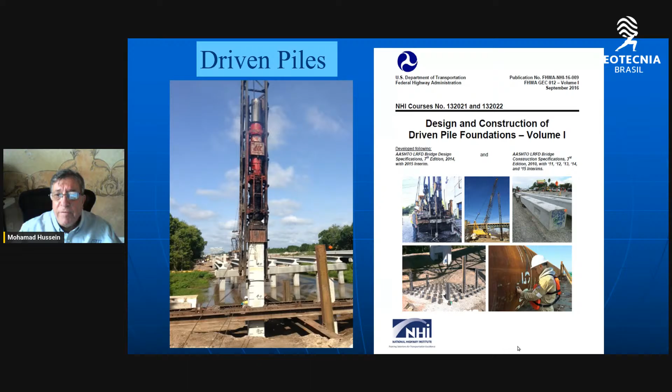They consist of driven piles, and there is a very important manual on the design and construction of driven pile foundations, in 3 volumes, written by engineers from our company, GRL Engineers, which can be downloaded from the FHWA government website for free in PDF format. I will leave my email address at the end of the presentation, so please send me an email and I can send you a link to download this 3-volume design manual.

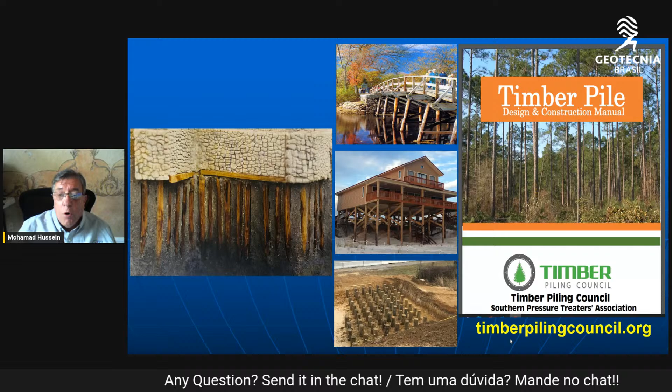Driven piles can be made of wood, concrete, or steel. Wooden piles, timber piles, have been used for thousands of years. In today's practice, they're typically used to support lightly loaded structures or temporary construction, or used as ground improvement supports. This is a manual that can also be downloaded from the Timber Piling Council for free, for the design and construction of timber piles, wood piles.

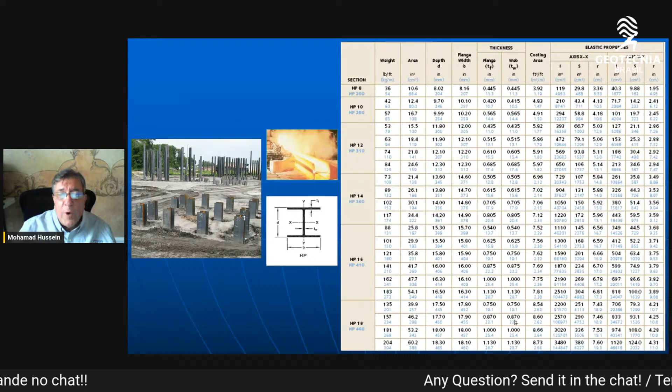Steel piles come in 2 major varieties: H piles and pipe piles. H piles come in about 20 different standard sections specifically manufactured for use as deep foundation H piles. Pipe piles come in a variety of sizes in diameter and length. They range in diameter from just a few inches to maybe a few feet, to more than a few feet, maybe 3 or 5 meters in diameter - very large. They can also be very long when used for offshore applications, for oil and gas exploration, and also for offshore wind farms.

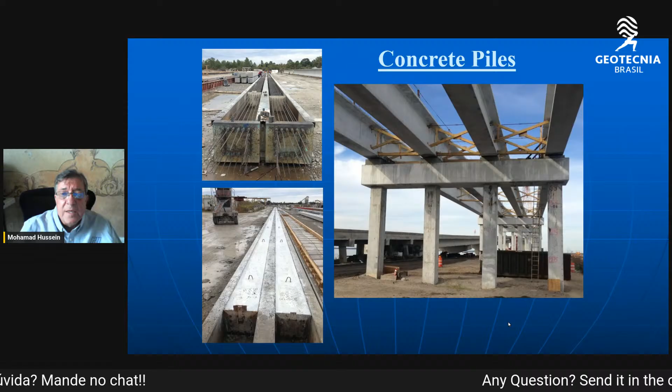Concrete piles are typically pre-stressed. They can be regularly reinforced at times, but they can also be pre-stressed or post-tensioned type concrete piles. The most recent development in concrete piles is the use of ultra high performance concrete, very, very high strength.

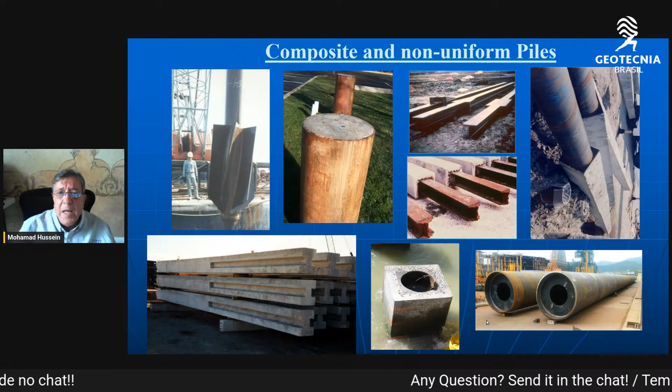While piles are typically uniform and made out of one material, they can also be made of multiple materials in composite, and can be highly non-uniform in profile depending on the design requirements.

There are hundreds of different hammer models ranging from the very simple to the extremely complex, from small to large: air, steam, hydraulic, diesel, single acting, double acting. There are literally hundreds of different hammer models available to drive the various pile types and sizes.

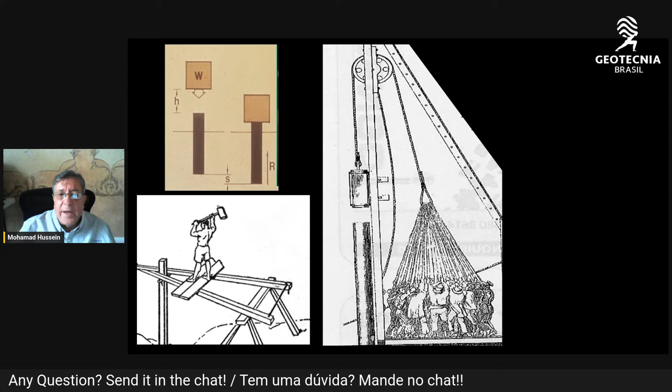For a long time, intuitively, people involved in pile driving had realized that there must be a relationship between the energy to drive a pile and how much load the pile can carry, its load-bearing capacity, relative to the energy it took to drive the pile. Mr. Wellington, in 1888, in the Engineering News magazine, wrote an article that relates the load-bearing capacity of the pile to the weight and drop height of the hammer.

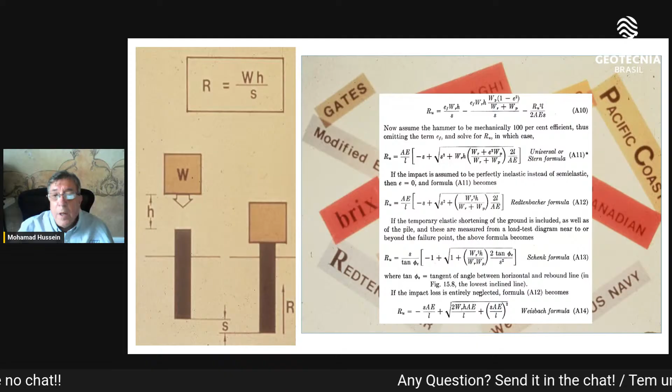This is known as the energy approach, or the ENR formula. Many famous people tried to improve on that formula, and we now have many hundreds of formulas based on that same principle. Some of these formulas look complicated, but they are not really any more accurate. So it would not be prudent to utilize 19th century approach formulas in today's practice. Not very effective, and not recommended for use.

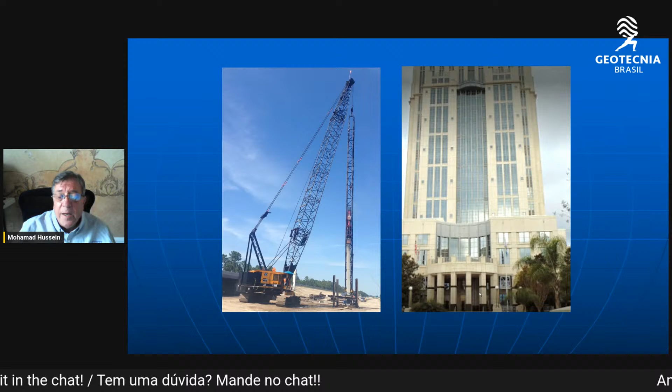So when we drive piles individually, we make a pile group to support maybe a bridge pier or a building. During pile driving, the pile resistance is dynamic pile driving resistance to penetration. But when we use the pile as a foundation, we need its static load-bearing capacity.

In order to evaluate the static load-bearing capacity of a pile, one performs a static load test, where we put load on top of the pile in compression, and then we plot the applied load versus the corresponding pile top movement.

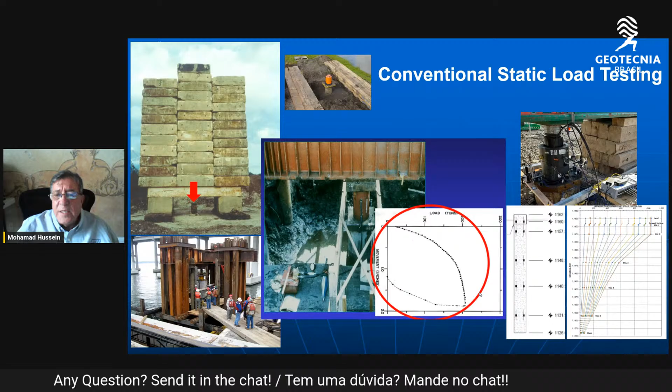We may also put strain gauges along the length of the pile so we can have the strain measurement, the force measurement inside the pile, which allows us to get the load transfer between the pile and the soil, showing how much skin friction and its distribution, and how much end bearing we have. So this is a static load test, and it is the best way we can evaluate the static load bearing capacity of the pile.

However, it has many limitations. It costs a lot of money and takes a lot of time to perform the static load test. In some cases, it could be impossible to do in certain situations. Also, there is an aspect of safety when we perform these static load tests. So although it's a good thing to perform a load test, it has many limitations in real practice.

So the challenge that we have is how do we get from the pile driving resistance during installation to the actual static load bearing capacity in service.

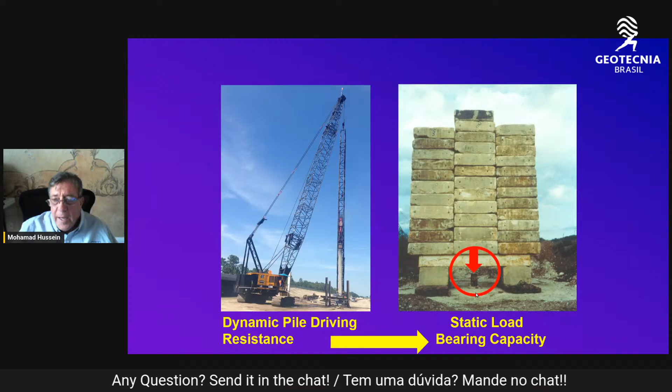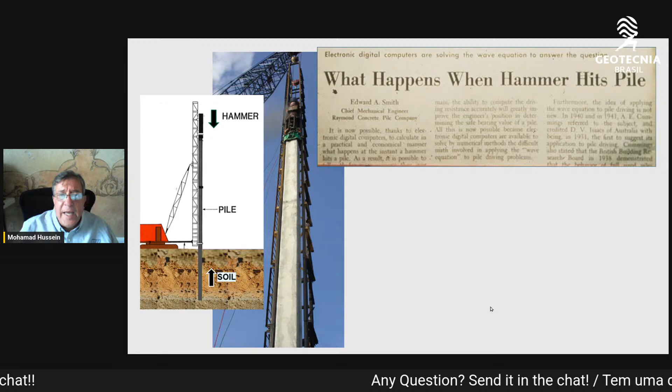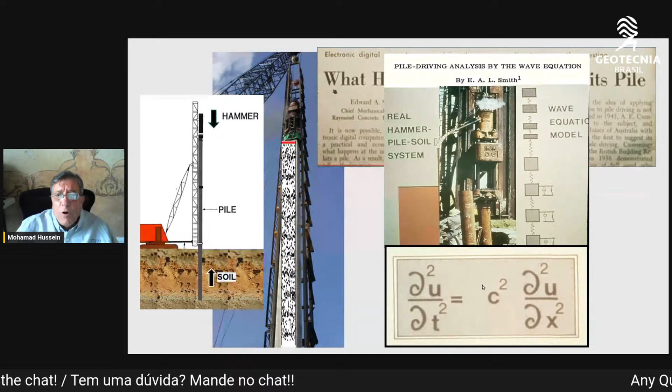Many very smart people for 500 years have thought about the dynamics of bodies in motion. They came up with a wave equation, stress wave propagation, and elastic theories that apply to pile driving. A very smart engineer called Mr. Edward Smith, in the 1940s in Texas in the United States, realized that the dynamics of pile driving are best represented by theories of stress wave propagation, elastic one-dimensional stress wave propagation in the pile, and he wrote a computer program that utilizes the wave equation, stress waves in the pile, to solve the dynamics of pile driving.

He wrote a computer program called the Wave Equation Analysis of Pile Driving. This program, which Mr. Smith wrote in 1948, is often cited as the first program in civil engineering, the first computer program written in civil engineering, to follow the stress wave in the pile, the dynamics of pile driving.

In today's practice, the most widely used program, maybe worldwide, for the dynamic analysis of pile driving is called GRL-WEAP, as commercialized by Pile Dynamics, available from Pile Dynamics.

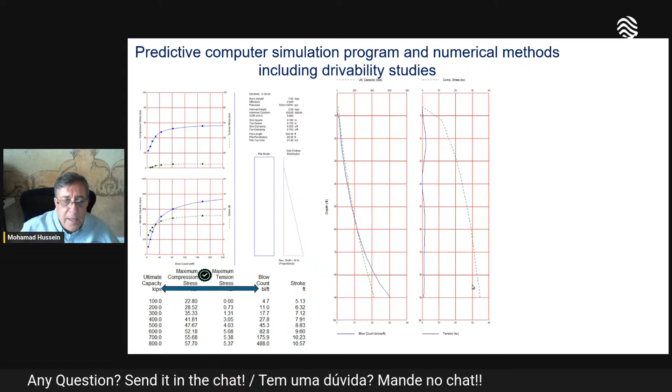It's a predictive computer simulation program that uses numerical methods to include pile drivability. We can assess the driving of the pile by simulation beforehand that provides information relating the pile driving resistance and blow count, blows per meter, to ultimate static load bearing capacity.

This can be used by the pile driving inspector by utilizing a unit called the saximeter on site to follow and automatically calculate the stroke of the diesel hammer, for example, and also to count the blow count every quarter meter of penetration, generating a completely automated pile driving installation log that can be used as quality control and assurance to drive every pile to the required resistance.

However, being a simulation program, it depends on a variety of assumptions to generate the model that is needed to perform the numerical analysis using wave propagation theories in the computer by simulation.

But some of these assumptions are very difficult to assume and to obtain accurately, such as the hammer performance, efficiency, the cushions of the material inside the hammer, and the pile-soil interaction, how much skin friction resistance, how much end-bearing resistance, and the elasticity of the soil to pile driving. So all of these assumptions are sources of error in the simulation type analysis of pile driving.

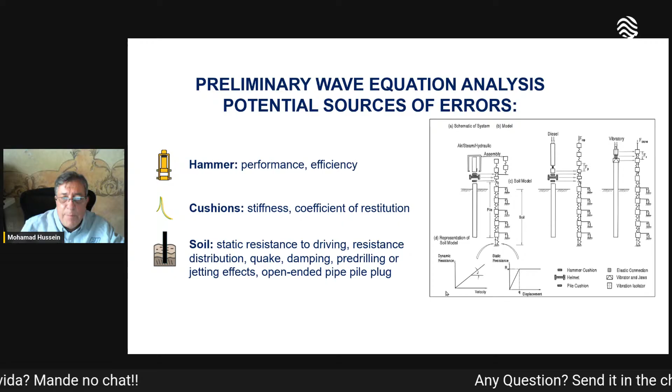So instead of assumptions, what if we think about measurements? If we go out on the job site and measure what we need to know, and analyze these measurements using stress wave propagation methods, that will allow us to obtain information regarding the performance of the hammer, the pile driving stresses, pile integrity assessment, and pile static load bearing capacity.

Between the period of 1964 and 1976 at Case Western Reserve University in Cleveland, Ohio, USA, a research program was undertaken, the goal of which was to come up with an accurate, reliable, cost-effective means to determine static load-bearing capacity from dynamic measurements during pile driving.

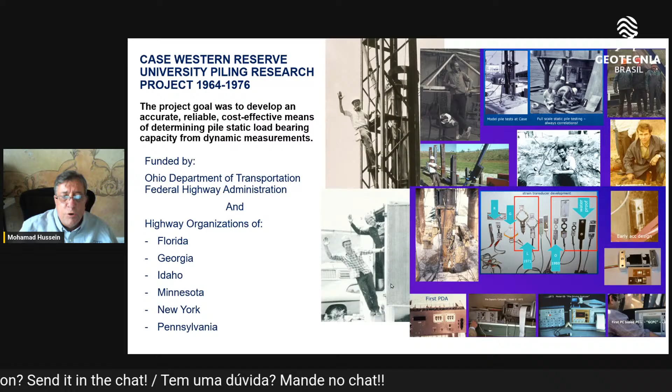That research was sponsored by the United States Federal Highway Administration, the Ohio Department of Transportation, as well as many states such as Florida, Georgia, Minnesota, New York, and others.

That research was headed by Professor George Goble and Dr. Frank Rausche and Gordon Likins. They invented, during that research, the equipment, the sensors, and the computer that were needed to take these dynamic measurements during pile driving.

They issued their final report in 1975 that included the outline of the schematic of the equipment needed for instrumentation, and also for the processing of the data, as well as the science, the formulas needed to calculate the static pile load bearing capacity from the dynamic measurements during pile driving, as well as correlations.

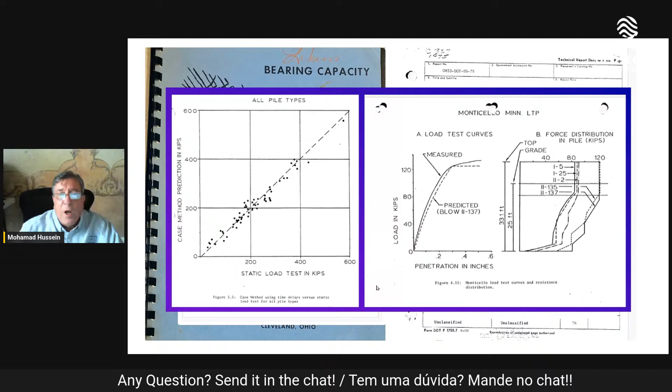They have about 60 or 70 different correlations comparing the prediction of static load bearing capacity from dynamic measurements to the actual full-scale static load test, and the correlation showed excellent comparison. So the researchers felt very confident that we can perform dynamic measurements during pile driving.

We can calculate static load bearing capacity values from these measurements that compare excellently with the actual full-scale static load test. These are the measurements that were taken during the research, and this is a big computer that was used to analyze these measurements.

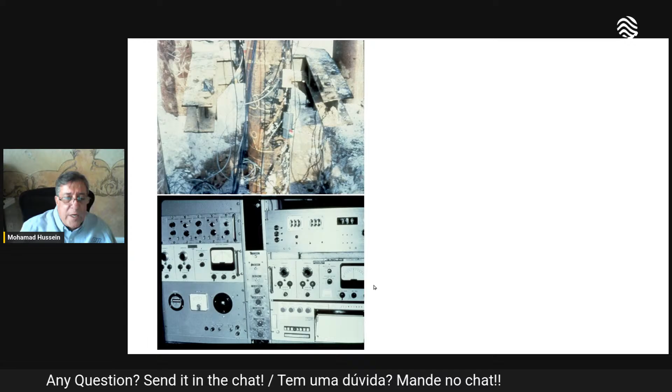So one can call this equipment the first pile driving analyzer. It is the first computer used to analyze pile driving data.

Nowadays, the instrumentation is very, very simple. It consists of two instruments, like 10 centimeters long each, only 3 inches long, very small, that are attached to the pile. They consist of a strain gauge and an accelerometer.

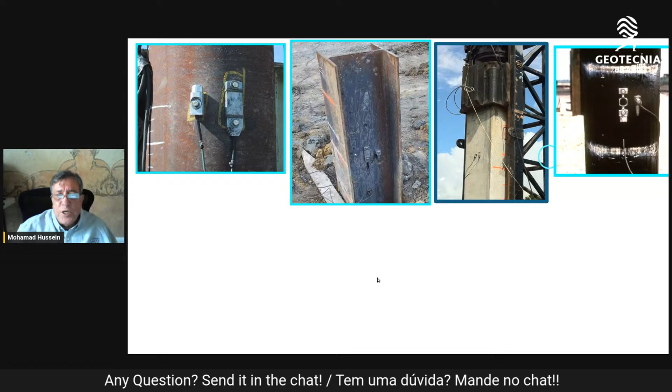The gauges, the sensors used to perform dynamic pile testing, can easily be attached. They are reusable, can easily be attached and taken off all types of pile types, as well as in-situ foundations such as bored piles and drilled shafts, and cast-in-place piles.

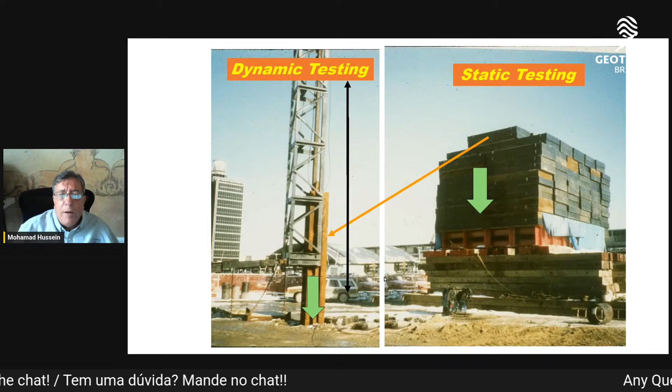I don't have to do any of this. This is being done on the job site with the pile driving hammer. So during the pounding of the pile, during the installation of the pile with the hammer blows, the pile is being dynamically loaded. So all we have to do now is put instruments on the pile and perform dynamic load testing during the pile driving process. The impacts of the hammer are the loading process needed to perform dynamic load testing during initial driving.

This has been standardized by ASTM standard D4945. Testing can be done with the testing engineer on the job site in real time, or it can also be performed remotely using site link technology. So the equipment can be on the job site, sending the data in real time to the engineer in the office, following the project, following the driving of the pile, and performing the testing remotely in real time.

So dynamic pile testing is a measurement of pile strain, therefore force, and acceleration, therefore movement. It is a measurement of pile force and movement under the impact of the hammer, and the analysis of these measurements using elastic stress wave propagation theories.

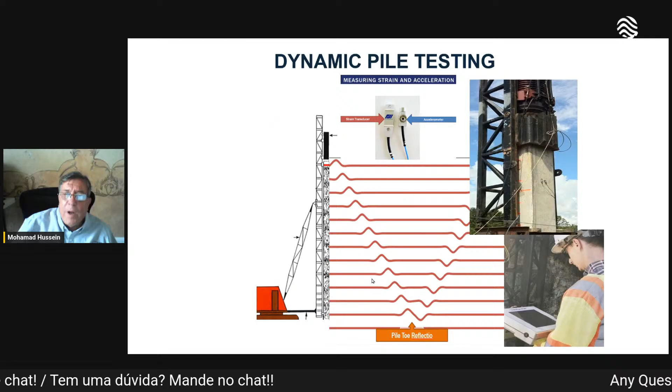The measurements are done with a pile driving analyzer, and the analysis is done by a program called CAPWAP, Case Pile Wave Analysis Program. When the hammer hits the top of the pile, it generates a stress wave.

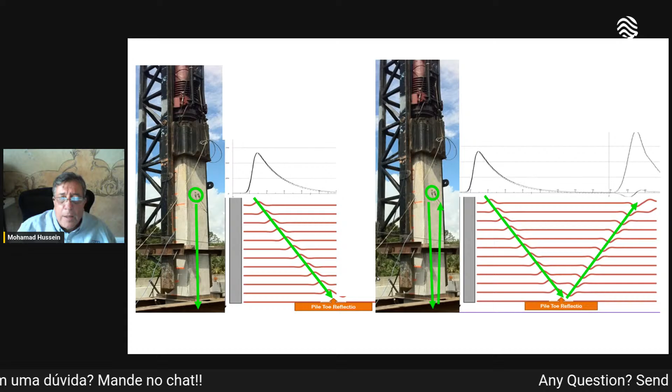When the stress wave reaches a gauge location, one meter below the pile top, the strain and the movement of the pile see a very sudden jump in value. Then the stress wave leaves the gauge location, travels down the pile length, reflects from the pile bottom, and then the gauges sense it again.

So this is one data set from one hammer blow indicating impact at the pile top and reflection from the pile bottom. Of course, the wave goes up and down many, many times during the one hammer blow. It takes about 50 or 100 milliseconds for the whole cycle to go back and forth. One travel cycle, one round trip down and up, is about 5 to 10, maybe 15 milliseconds — a very short time.

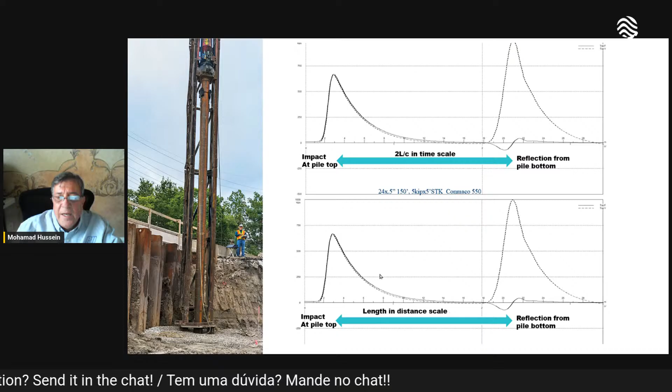So for the measurements of one cycle — impact and reflection, one reflection from the pile toe — we measure it in the time domain. Then we can change it to the length domain by knowing the constant stress wave speed of the pile material. So although we take measurements in the time domain, we do the analysis and evaluation in the distance, or length, domain of the pile.

There are two fundamental principles to keep in mind when we do dynamic pile testing: 2L over C, where L is the pile length and C is celerity, or stress wave speed value. The other value is called Z, which is the pile impedance, giving us a relationship between the two independent measurements of force and velocity.

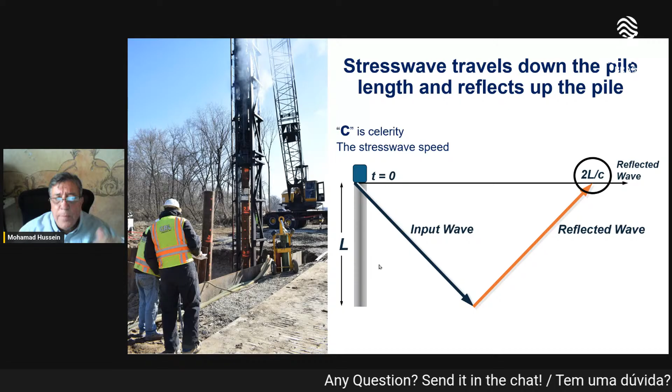We need the value 2L over C because that is how we track the movement of the stress wave down the pile and back up; it gives us the timing of the wave reflections. The impedance value Z gives us a relationship between the independently measured force and velocity in the pile, because force and velocity are directly related to the impedance of the pile.

The impedance of the pile, Z, is a quantity EA over C — elastic modulus times area divided by the stress wave speed — so it is a constant for a specific pile type and size. If we know the impedance of the pile from its elastic modulus, area, and wave speed, all constants, we multiply that by the measured velocity to relate it to the measured force. From these measurements of force and velocity at the pile top, we can calculate the wave going down the pile and the wave going up the pile.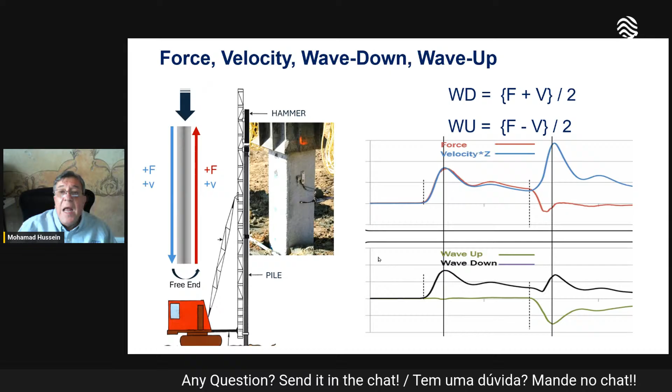So now we have the waves in the pile going down from impact of the hammer and waves reflected under each and every hammer blow. Since we're taking measurements during pile driving under each and every hammer blow, we now have a complete full record of the installation, and therefore the testing of this pile in its entirety. Every blow has a value.

Now we can group all of these different blows. We can average them per 25 centimeters of pile installation, or per meter, or per foot, or per inch. We can group them as such and plot them as a function of pile penetration depth. So the y-axis is pile penetration depth, and the different quantities versus penetration depth are shown.

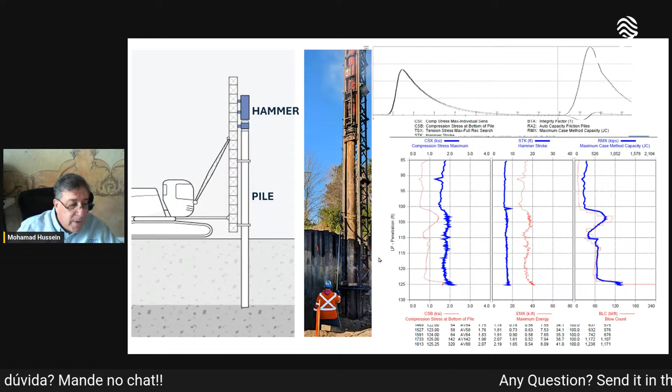So this gives us a full record of the pile installation of this pile, data of capacity and blow count versus penetration depth. This data can then be used to evaluate the hammer performance, the pile performance, and the soil performance.

So the hammer performance: the hammer has a potential energy, which is the rated energy of the hammer, weight times drop height, which is the maximum energy of the hammer. Then the hammer falls, drops, compresses the cushion inside the hammer, accelerates the helmet on top of the pile, compresses the plywood cushion if we're driving concrete piles, for example, and finally reaches the top of the pile.

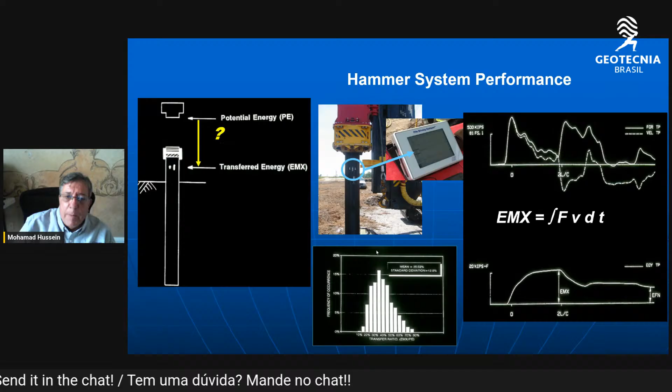We call that maximum transferred energy. The ratio of maximum transferred energy to the pile as a percentage of the maximum potential energy of this hammer varies widely. So the best measure of hammer performance is to measure how much energy the pile actually receives with the pile driving analyzer, the PDA. We measure the amount of energy under each and every hammer blow, then we compare that to the potential energy of the hammer, or the rated energy of this hammer.

This range can vary widely, somewhere between 10% to 80%. It could be anything in between. So why does it vary so much? It varies so much because depending on the mechanical condition of the hammer, the state of maintenance of the hammer, as well as the condition of the cushions inside the hammer, and the condition of the cushion on top of the concrete pile. Because of all of these reasons, the hammer varies widely in how much it transfers.

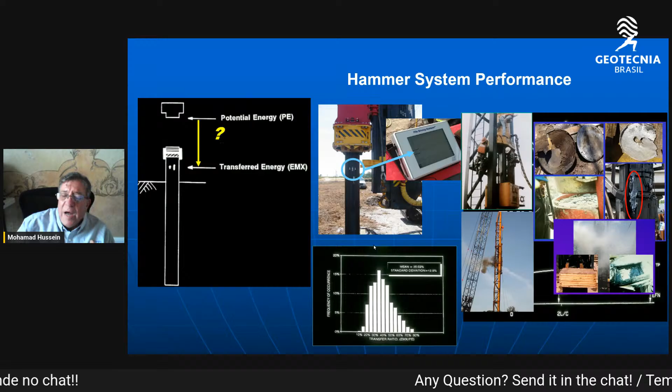Of course, this is very important when we're using this hammer energy, when we're driving piles according to a blow count criteria, to make sure that the hammer performance is up to the level required to provide the capacity of the pile based on hammer driving blow counts. So that's the performance of the hammer that is established under each and every hammer blow.

Now, pile performance. Under the impact of each hammer blow, the pile undergoes a very complex state of stresses that includes compression, tension, torsion, and bending. The data obtained from the measurements under each hammer blow will allow us to evaluate the stresses on the pile and the structural integrity of the pile.

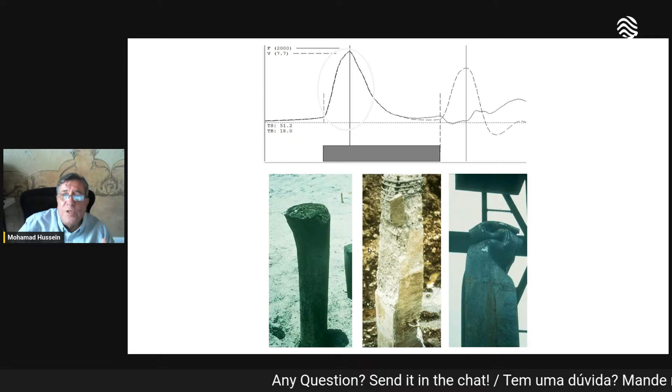From the measurements themselves, we can use them to control the stress in the pile because we're measuring force, therefore we know the stress in the pile in compression under the impact of the hammer. This will allow us to evaluate the stress level in the pile and try to reduce the risk of damaging the top of the pile under the initial impact of the hammer.

Since it's a dynamic measurement over time of the stress wave in the pile, we can calculate from the measured stress value at the top of the pile the stress value anywhere along the length of the pile, at any location X, including X equals L, which is the pile length. The pile tip stress is a very special location because when we drive piles to a very hard layer, the stress at the bottom of the pile can potentially be twice that at the top of the pile.

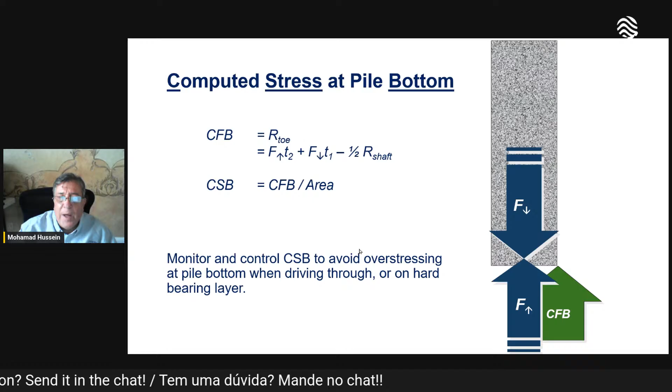We can have twice as much stress at the bottom of the pile in compression as at the top. That's because the compression stress at the top comes from the hammer impact, and that compression wave travels down and reaches the bottom of the pile. If we have a very hard end-bearing layer, it activates an equal and opposite reaction, also in compression. So the initial compression wave adds up with the reflected compression wave, both located at the bottom of the pile. That's why we can have twice as much stress at the bottom as at the top. We calculate that compression force and compression stress at the bottom.

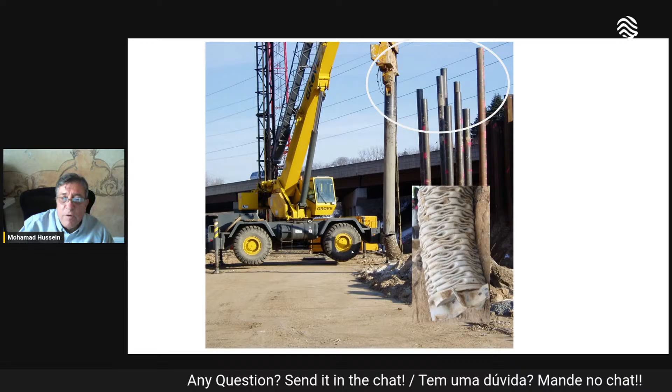Here's a project where piles were driven into a very hard layer with very large end-bearing resistance. The top of the piles showed no damage, but when we extracted some of these piles, we saw damage at the pile bottom because of this doubling effect of stresses, caused by the very high end-bearing resistance combined with high initial impact compression stress.

When driving a concrete pile, the compression stress from the hammer travels down the length of the pile. If there is little or no resistance, that compression wave, upon reaching the pile bottom, pulls down on the pile, putting it in tension. If there's too much tension, it may crack the concrete pile. This is why concrete piles crack in tension during easy driving, from the compression wave reflecting up as a tension wave that elongates the pile. If that tension is too high, the pile will crack.

This also allows us to draw a tension envelope along the pile, so we know the amount of tension at every point along its length. This is important, for example, at special locations like a spliced pile. A splice in a concrete pile creates a weak link with limited tensile strength. So we need to know not only the maximum tension stress in the pile, but by using the measured data, we can draw the tension envelope and know the exact stress level at the splice location, so we don't break the pile or the splice.

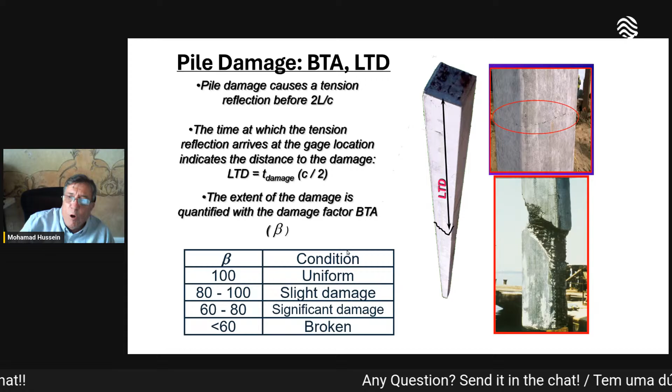This data shows early reflections indicating damage in this extracted concrete pile, as well as damage at the bottom of this steel pipe pile from the measured data. This is also data from a concrete pile showing damage at the very bottom of the pile. This is a very large pile, 24 inches in size.

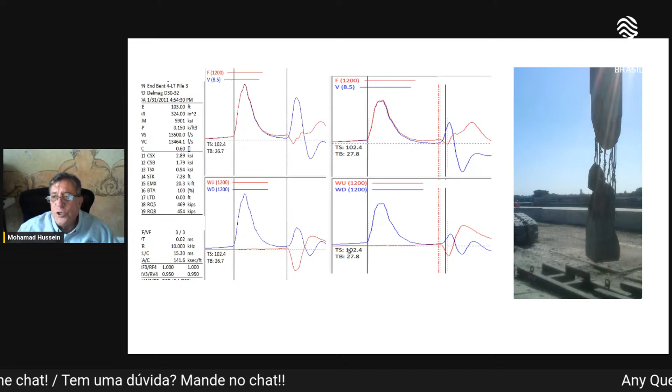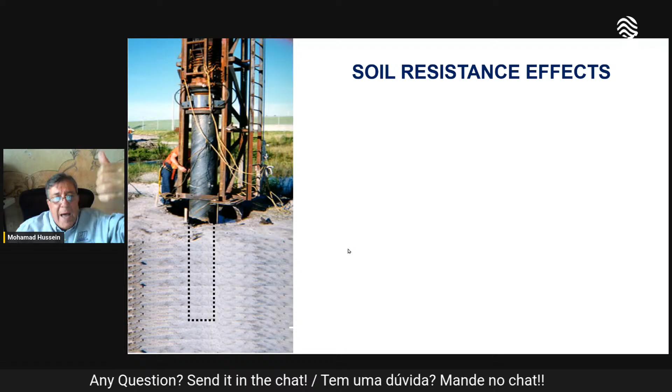So we've talked about hammer performance and pile performance. Next we'll talk about pile-soil interaction performance, or soil resistance performance, and static load-bearing capacity. When the hammer hits the top of the pile, it generates a stress wave—stress times area equals force—so the hammer forces the pile down into the ground, displacing it. As the pile displaces against the soil, it activates soil resistance in skin friction and end bearing. Both the hammer impact and the reflected wave produce data in the measurements. So the measured data incorporates the wave going down the pile from the hammer, and the wave going up the pile from the soil resistance, based on the PDA measurements at the pile top of force and motion, using strain gauge and accelerometer.

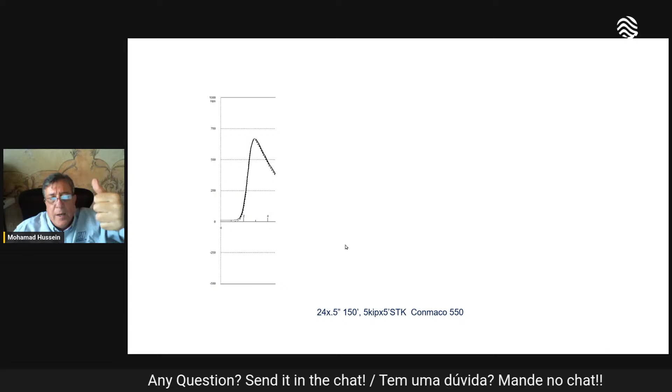When the hammer hits the top of the pile, we have a quick increase in force and velocity of the pile as measured in the data. Then the stress wave leaves the location and arrives at the pile bottom, and it gets reflected, depending on the end condition. If we have a free end or no resistance, then the reflection will be zero force and very high velocity. So the pile will move more down because there's no end bearing.

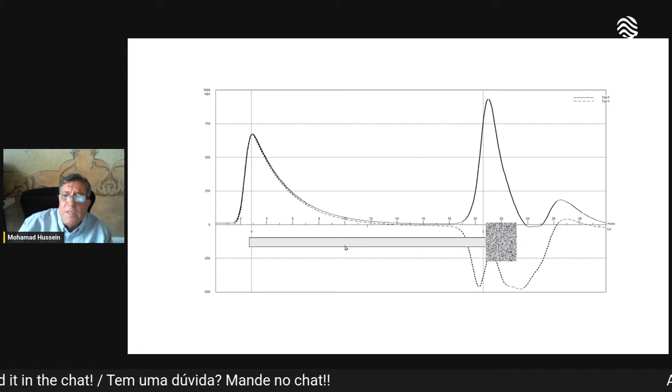If we have end bearing resistance, then the reflection will be the opposite. When we have no resistance, the reflection from the pile bottom on the right-hand side of the plot consists of zero force because we have no resistance, and very high velocity also because we have no resistance. But if we have a lot of end-bearing resistance, then the force is high, solid line, and the velocity is zero at the pile bottom. So that is the difference between end-bearing and no end-bearing resistance in the measured data at the pile top.

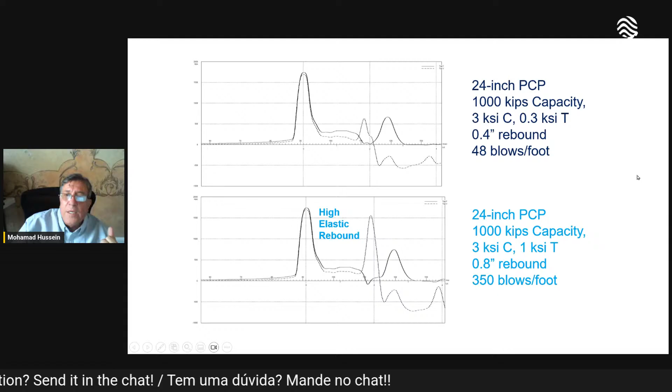So if we have 1,000 kips capacity, with normal pile driving, we need 48 blows per foot. And if we have high elastic rebound, to obtain 1,000 kips, we will need 350 blows per foot. So the rebound effect is expressed in the measurements of the data at the pile top.

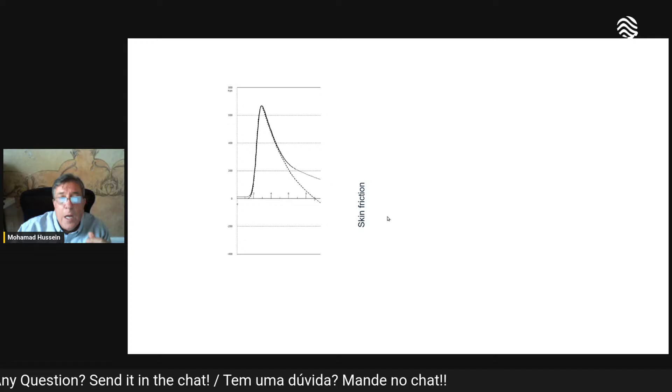So now, again, if the hammer hits a pile top, the stress wave goes down. If we have skin friction resistance, it will tend to increase the force on the pile and reduce the velocity. So as the wave goes down the pile length, if we have skin friction resistance, then the solid line, which is the force, will increase, and the velocity, which is the dotted line, will decrease along the pile length until we get to the pile bottom.

Therefore, a pile with skin friction resistance will indicate in the pile measured data, pile top measured data, a separation between the force and the velocity between the pile top and the pile bottom. This data here on the pile top shows end of initial driving data, showing a little bit of skin friction by the separation in the measured data of force and velocity between the pile top and the pile bottom. In this case, we have 200 kips of ultimate pile capacity, 150 in skin friction, and 50 kips in end bearing. The blow count is 32 blows per foot at end of initial driving.

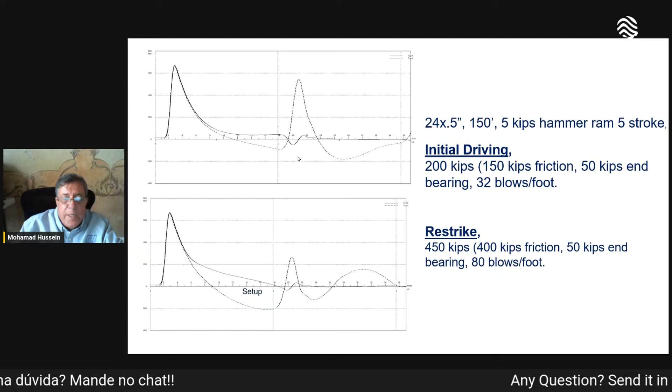We gave this pile some time to set up, so we did a restrike test. Now, as we can see, the force and velocity have more separation, so we have more skin friction. The total pile capacity at restrike, due to the time effect of consolidation of setup, is 450 kips, 400 of which in skin friction and 50 kips in end bearing. Now the blow count had also increased to 80 blows per foot. So this is how we see the effect of the setup on the pile capacity versus time, and the calculation of capacity, increased blow count, and increased skin friction resistance as demonstrated in the measured data.

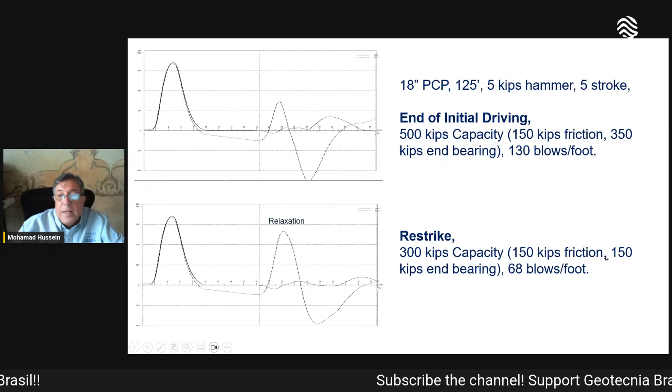If we give the pile time and test in restrike, the capacity had decreased from 500 to 300 kips. The blow count decreased from 130 blows per foot to 68 blows per foot, and the decrease of capacity was in end bearing. There we see a huge velocity increase in end bearing resistance as opposed to the end of initial drive. So initial drive has high resistance, that's why the velocity was low at the tip of the pile. In the restrike, because of the relaxation effect, the velocity of the pile now is much higher. The pile is moving more in end bearing due to the relaxation effect. So in any event, this is how relaxation expresses its effect in the measured data between end of initial drive and restrike testing.

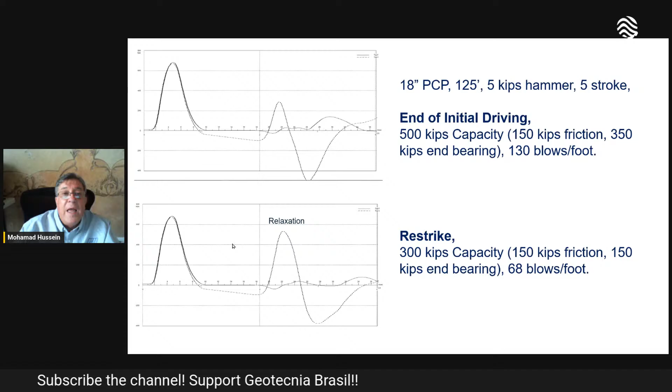So these resistances that go up the pile generate a wave up the pile. We add the wave down and the wave up, and we can quantify the total resistance of the pile, and also the location of that resistance in skin friction along the length of the pile and in end bearing.

We can quantify it and qualify it as well with the measured data, using this formula that calculates the static load bearing capacity from the measured pile top force and velocity record, wave down and wave up. This method, called the Case Method, has been published by the American Society of Civil Engineers as one of the top 100 most important papers in geotechnical engineering.

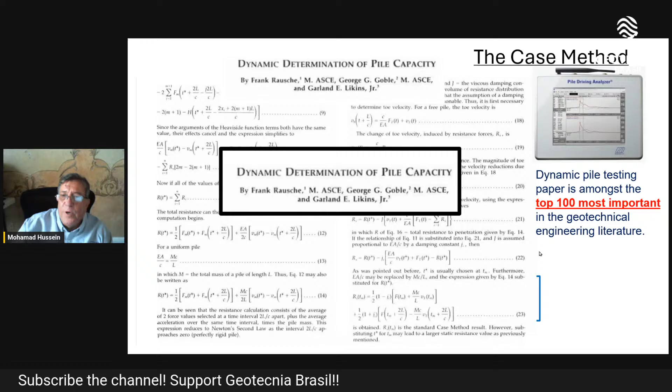From the measured total resistance, we can calculate a static load bearing capacity by introducing a dynamic damping factor of the soil, depending on the soil type. We plug it into the formula that takes into account the measured wave down and wave up from the data and calculates a static load bearing capacity. This is done in real time on the job site by the PDA, the pile driving analyzer, for each and every blow. We assume the damping factor depending on the soil type.

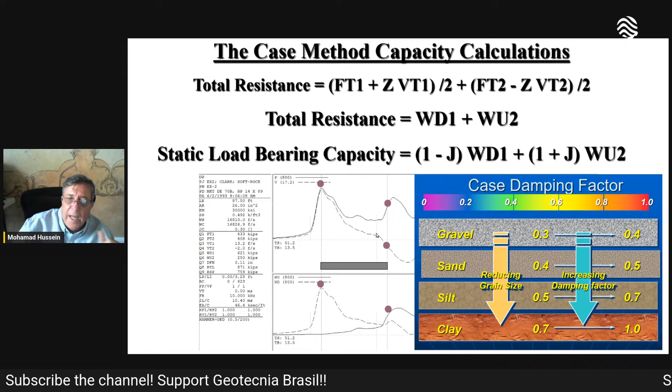We can then take the same measurements and apply the analysis of CAPWAP, the case pile wave analysis program, that uses signal matching techniques to resolve the measured data into skin friction and end bearing by taking into account the actual profile of the pile. If the pile is non-uniform, we can model exactly the pile profile in area and maybe material change along pile length.

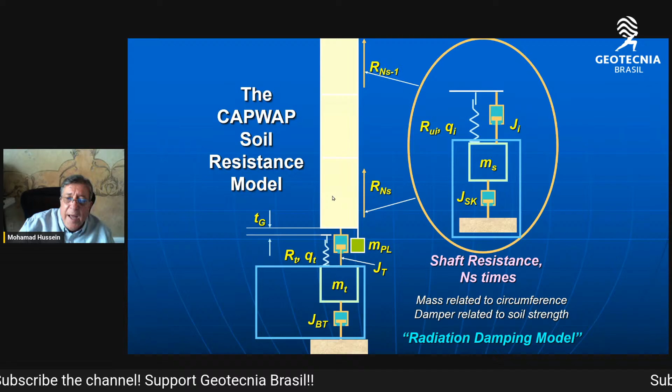Then we can concentrate on the evaluation of pile-soil interaction by utilizing these models of static and dynamic components of the soil resistance, as well as take into account any dynamic radiation damping into 3D into the soil.

So we use this CAPWAP program by simulation of the measurements going down, utilizing the measured wave going down and simulating a wave up that we compare to the measured wave up, by signal matching process interactively between the engineer and the computer to come up with the best fit, best match of the data. This process can also be done completely automatically by the pile driving analyzer on the job site as well, the signal matching by ICAP.

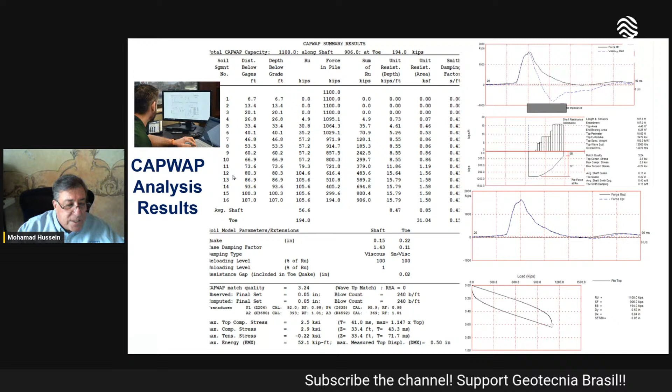So the result of this CAPWAP analysis is the separation of static load bearing capacity into skin friction and end bearing, and the distribution of skin friction along the pile length, which will then allow us to simulate the static load test result. So now we have a simulated static load test result from the measurements of the PDA and the CAPWAP. We can simulate pile top load versus movement.

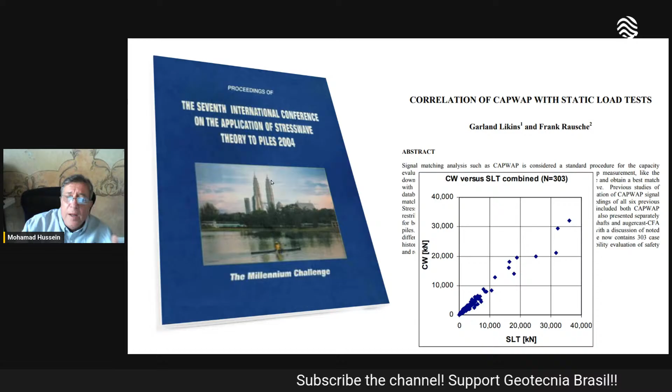So how good is that? How does that compare to actual full-scale static load test? There have been many studies in the literature independently comparing the calculated static load bearing capacity of dynamic measurements to actual full-scale static load tests, by many researchers and practitioners worldwide over the last 50 years. If we have good quality data and competent analyses, one can expect a good correlation between the simulated static load test result and an actual full-scale static load test, as we see in this case.

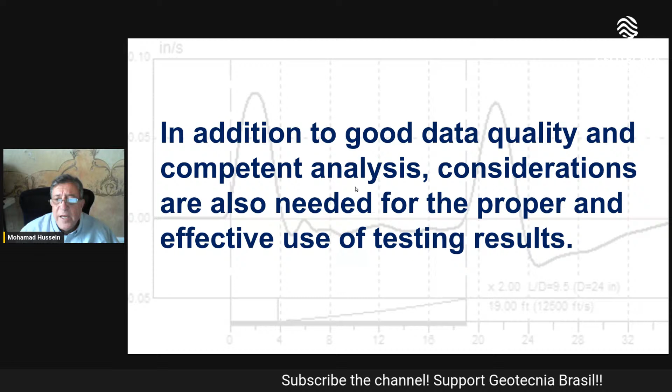So now, what if we were to use superposition? If we take the end bearing from the end of initial drive and the skin friction from restrike and add them together, we come up with 1,600 kips. That compares very well with the actual static load test, 1,630 kips.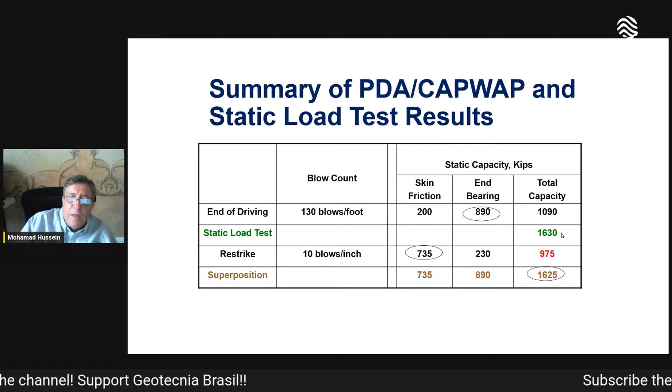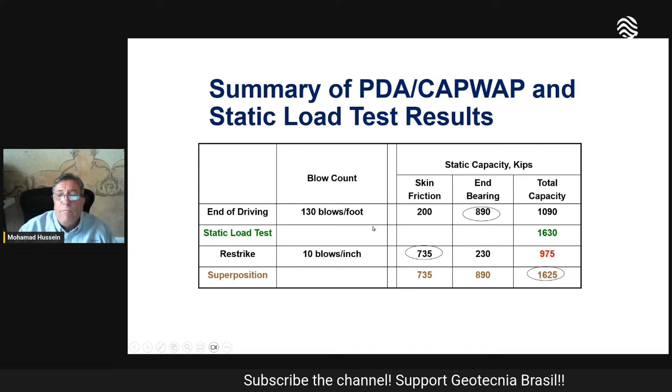So using superposition, when we have cases where the hammer energy is not sufficient to fully mobilize all of the capacity in restrike because we have so much skin friction, added to the already very high end bearing from end of initial drive. So this is one case that shows the use of engineering considerations in evaluating the dynamic resistance during initial drive, the static load bearing capacity during initial drive, and in restrike, and a holistic approach to come up with the best result of the test that compares very favorably well with an actual full-scale static load test.

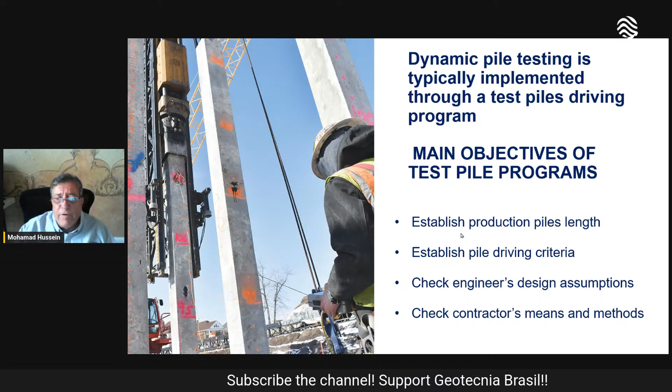So this dynamic pile testing is typically applied on a project by way of a test pile driving program, where the engineer may choose a number of test piles to drive and to test them with the PDA, analyze them with the CAPWAP program, in order to establish production pile length and production pile driving criteria, as well as to check the engineer's design assumptions of the foundation, and also to check the contractor's equipment, means, and methods. That is a standard conventional way of applying dynamic pile testing on a pile driving project. It has been done this way for about 50 years.

Alternatively, the modern practice, for example in the state of Florida, every single pile is tested. So we have 100% dynamic pile testing, whether or not we use a test pile program. Every pile, test pile and production pile, is tested with the pile driving analyzer. They have found that this optimizes construction efficiency and economy. It actually makes the project less expensive than running an independent test pile driving program, and also it increases the engineer's reliability. So if the engineer knows that every pile is tested, verified for integrity and capacity, then the design can utilize a much lower factor of safety that makes the foundation much more efficient and economical.

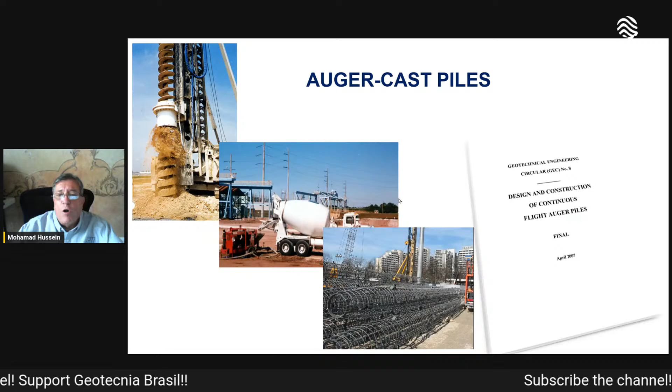So that was testing of driven piles. Now we can apply the same dynamic load testing to also drill shafts, bored piles, and auger cast in place piles. So in addition to applying dynamic pile testing to driven piles with a hammer, we can also apply it to cast in place, cast in situ, deep foundations, bored piles, and drill shafts. There is a manual also on drill shafts that you can download from the same source I mentioned earlier, as well as for auger cast piles. There's also a design and construction manual you can download.

So we are familiar with low strain testing. With a small handheld hammer, we send down a stress wave, we wait for reflections, and we use that for integrity. This will tell us something about the integrity of the shaft, but nothing about the load-bearing capacity.

To evaluate load-bearing capacity, we need a bigger hammer. We need a big enough hammer to move the shaft. We have to perform a high-strain dynamic load test to move the pile against the soil, to activate resistance and calculate load-bearing capacity. Well, how big should the hammer be? We have to bring in a drop hammer and impact the top of the drill shaft. How big should the hammer be?

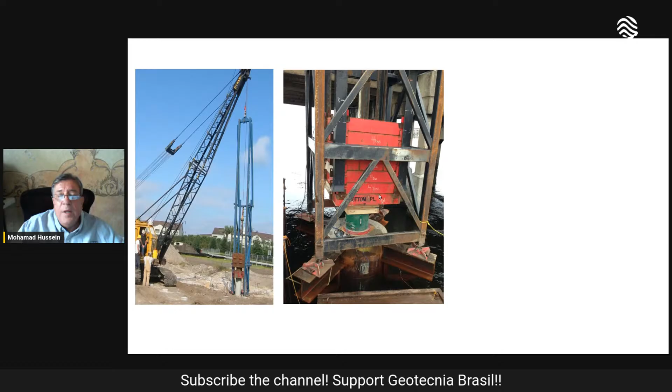Additionally, we can also apply thermal integrity profiling by putting thermal wires along the length of the reinforcing cage and the drill shaft, bored pile, in order to measure the temperature and then evaluate the shape of the pile, because the shape of the pile will be variable. We will need this information in order to model the pile shape in our dynamic load testing data.

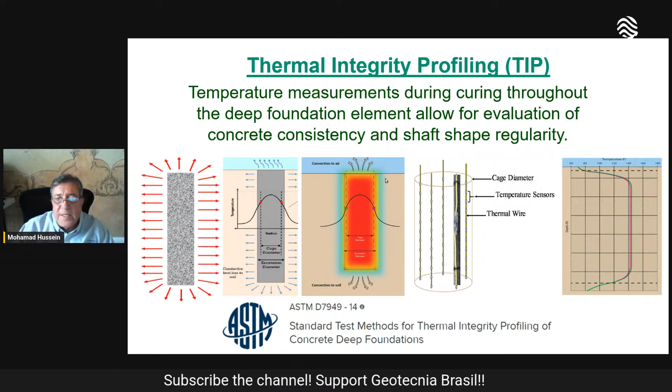This method of integrity profiling of the cast in place drill shaft has won so many awards. It is the most innovative introduction of technology in deep foundations for the last many years. It relies on the measurement of temperature by utilizing the heat created during the curing of the concrete, due to the cement chemical reaction inside the drill shaft during curing. So during the first one or two days of curing of the concrete inside the shaft, it generates heat that we measure using these wires, and we get a profile of the shaft.

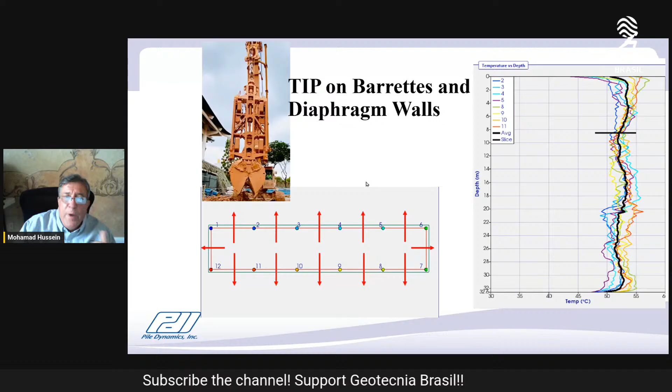We get a profile of the concrete from these measurements of temperature using thermal integrity profiling, which gives us the shape of the drill shaft in the ground. We can then plug that into the dynamic measurement data. This type of thermal integrity profiling has also been used on barrettes and diaphragm walls for integrity assessment. We get the drop hammer, put it on top of the shaft, and with the profile already from thermal integrity profiling, we can plug it into the model.

We calculate using signal matching, like we did before with the CAPWAP program, and come up with a static load test simulation. So we can simulate the soil resistance because now we know the profile of the shaft from thermal integrity profiling. This puts together the integrity testing result with the load-bearing capacity result, thermal integrity profiling, and PDA CAPWAP results for best analysis of the data.

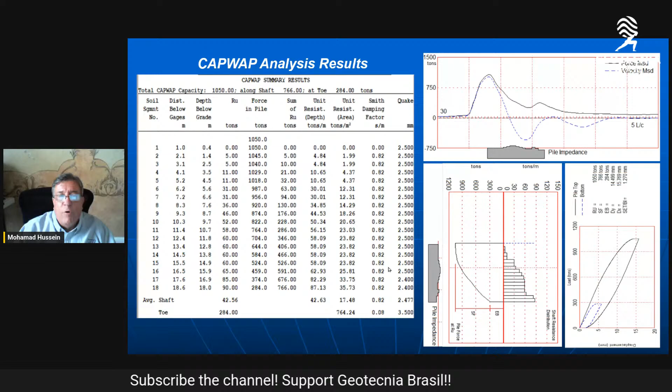Dynamic testing can also be used for other applications, such as calibration of the SPT hammer energy. ASTM requires calibration of the hammer energy because we rely on the N values of the SPT hammer to design the foundation. But the N value, the number of blows, is also dependent on the efficiency of the SPT hammer. So hammers are supposed to be calibrated, and these dynamic measurements can be used to calibrate SPT hammers.

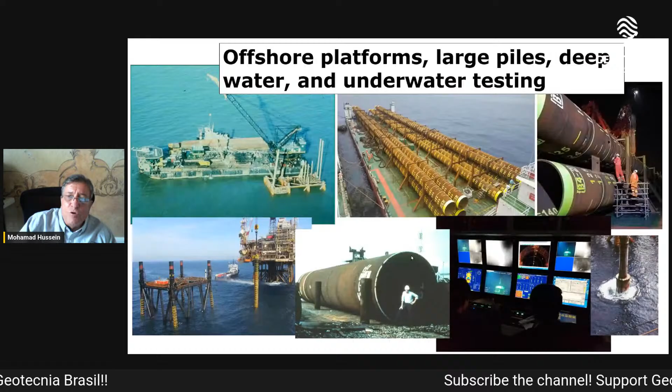Dynamic testing can also be used to test micro piles with a small drop hammer, as well as very huge piles for offshore applications using a pile driving hammer. It can also test helical piles for load-bearing capacity assessment using a small drop hammer performing dynamic load testing.

As well as, in the United States, what is called Becker drill testing, used to evaluate and characterize the soil and the site for liquefaction, and therefore for seismic design considerations.

This is a very unique application of dynamic testing: testing a very large 3-meter diameter, 100-meter long pipe driven horizontally, laying down under a roadway and railroad track to form a tunnel. They drove this pile using a hydraulic hammer, laying down horizontally to use as a tunnel, and dynamic pile testing was used to control the driving so they would have no effect on the roadway and the railroad track above it.

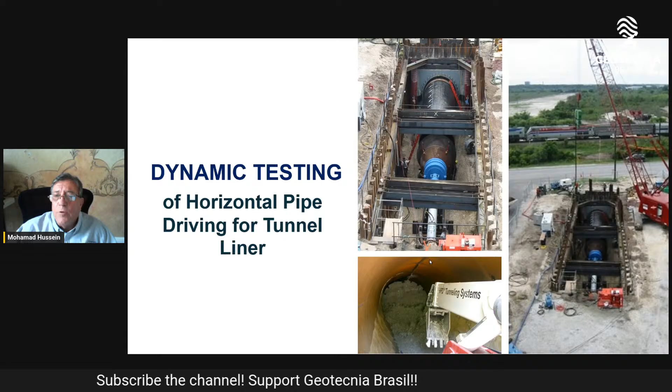We're familiar with static load testing and bidirectional load testing. When we evaluate the data for these tests, performing the test and putting strain gauges along the drill shaft to evaluate the load bearing capacity and the load transfer using strain gauge measurements, we need the profile of the drill shaft - the area versus depth versus length - in order to evaluate the load transfer.

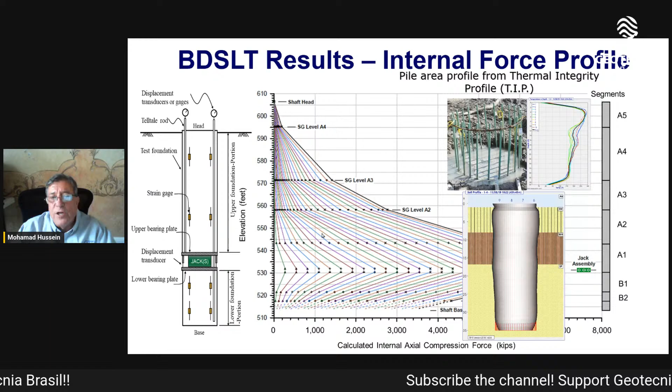We have to calculate force from measured strain, and to do that we have to know the area. Thermal integrity profiling allows us to get a profile of the shaft, the area profile, so we can more rationally and accurately analyze the strain measurements to calculate force, and therefore calculate the skin friction in the pile from the static load test, whether it's a bidirectional static load test or a conventional top-down static load test.

Every shaft should be fitted with these thermal wires from thermal integrity profiling. That is the only way we can get a good profile of the shaft in place, and the only way we can have a rational analysis of the measured strain to come up with force in the pile and therefore skin friction between pile-soil interaction. So we need that profile.

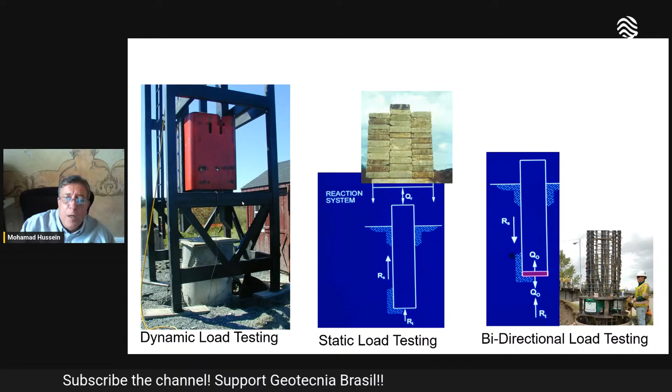So whether it's a dynamic load test, a conventional static load test, or a bidirectional static load test, these cast-in-place piles, cast-in-place shafts should all be fitted with thermal integrity profile wires in order to give us the profile of the shaft we need for proper analysis of the load test data.

All of these methods I mentioned today are widely available in standards, codes, specifications, conference proceedings, reference books, and textbooks. So there is no shortage. There's a lot of data available and information on correlations that describe the methodologies, the principles of the methods, their limitations, and their capabilities.

Garland Likins had gone over other aspects of testing of deep foundations having to do with CSL testing and thermal integrity profile testing for integrity assessments.

I wanted today to concentrate on the assessment of load-bearing capacity by dynamic testing. These testing methods, as I described to you today with the PDA and CAPWAP, are used worldwide. We estimate them to be used on more than 5,000 projects each year worldwide, so there's a lot of experience gained every day using these methods of evaluating deep foundations.